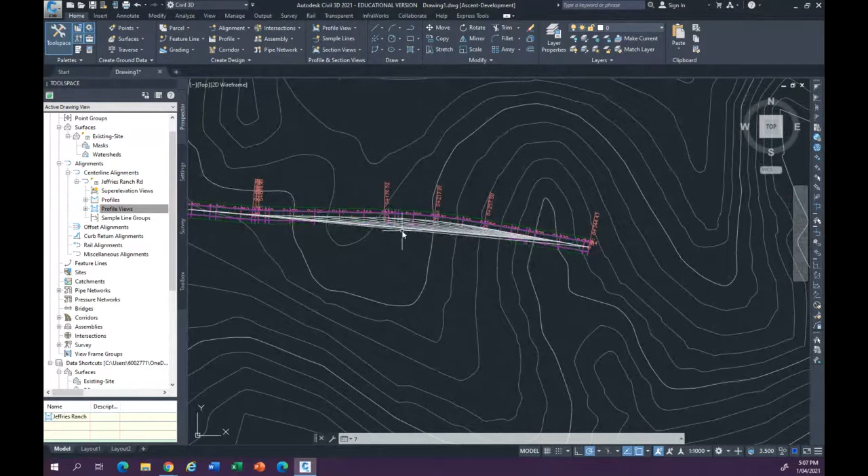So we know that, right? We know the profiles. In chapter 6, what we learned is the alignment, isn't it? We're learning the alignments in chapter 6, right? So we can see that we have the alignments here. This is the alignments, and I assume that you may probably have finished that. But if you haven't finished it, that's fine.

All right, and that is the... hold on, hold on, hold on. Are you Peter? Yes. Yeah, remember.

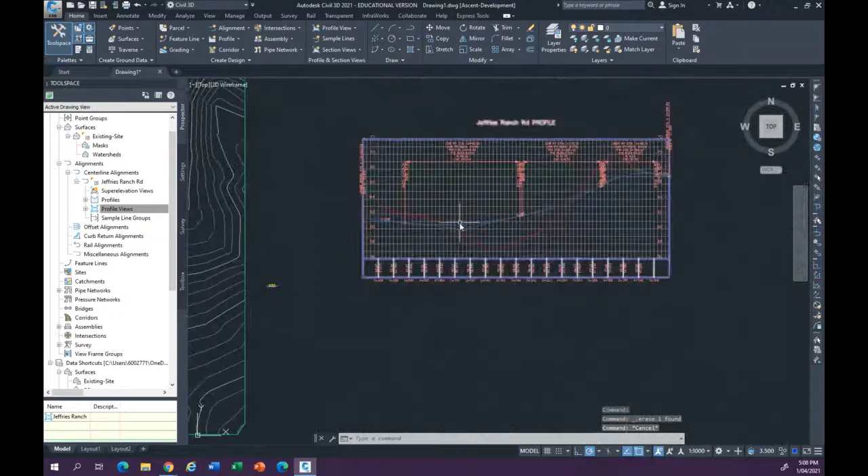Okay, so in chapter 6, what we did is the alignments, right? So after we have the alignments, how we can create... see, this is alignment, is it? Yeah, so we have alignments here. After we have alignments, we just have alignments, we don't have anything, right? So after we have alignments, you may probably need to, because the alignment has the, if you just create alignment, what happens is the alignment will actually follow the surface.

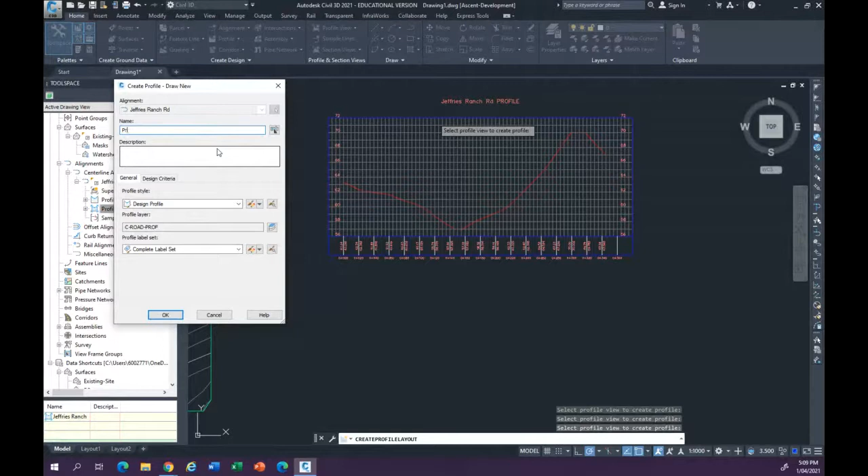So what we need to do next is create a profile to flatten a little bit of the alignment. So we can create a profile to flatten it a bit, like the alignment profile. We can call it alignment profile one. Okay, and then now we can draw some profiles. Where's my drawing tools here?

Okay, you can draw some profiles to say, okay, so I may probably want the road to be like 2 degrees grade, then 2 degrees grade, and probably like 2 degrees a little bit, and go up like this. I think it's a little bit hard here, cannot drive it. Trying to shrink it back. It's nothing, that's why. So probably go like this.

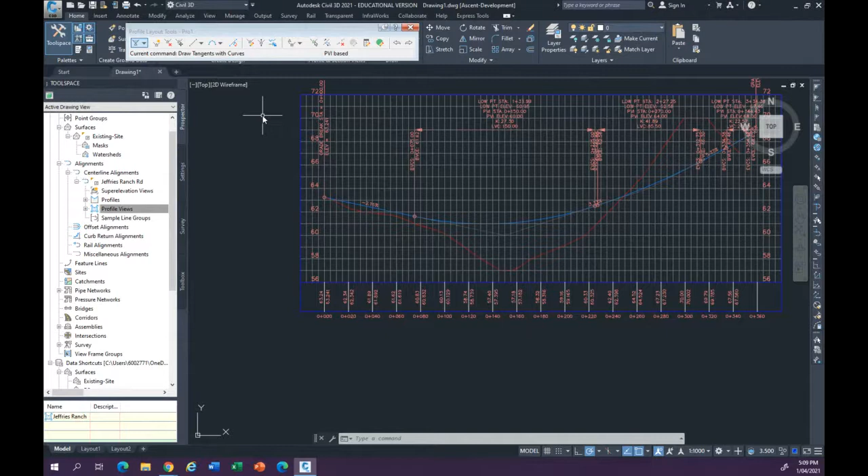So basically, the blue lines is one alignment for you, and then this alignment is for you to create a road, a corridor, right? And also you can create multiple alignments and then compare different corridors, compare different alignments, see which one was more economic, or more comfortable, or more suitable for you to create a corridor. So just create one alignment first for you to know, and after that, what you need to do is...

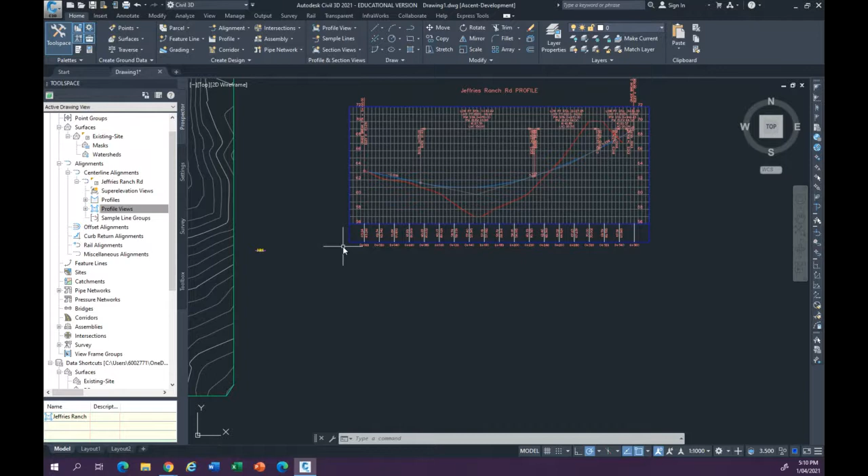After you have this vertical profile, what happens is you need to have a horizontal profile, which is the section view of the road, right? And then you can see, okay, what are the components on the road. So you can create a corridor like a sweep, swept from the alignment to the road. So that means this is called assembly in Civil 3D. So it's called assembly, basically assembly is a horizontal profile for you, right? If after you create assembly, because assembly is actually, right?

Assembly, why I call it assembly, is because it has a center line, right? It has a curb, it has the road pavements, and they have everything inside. So that means you can build your own assembly. You can create one and just put it anywhere in the empty space like this.

So I draw one here, so you can put it here. Just click that, it will zoom into that center line for you of that assembly. So that means you already have this assembly.

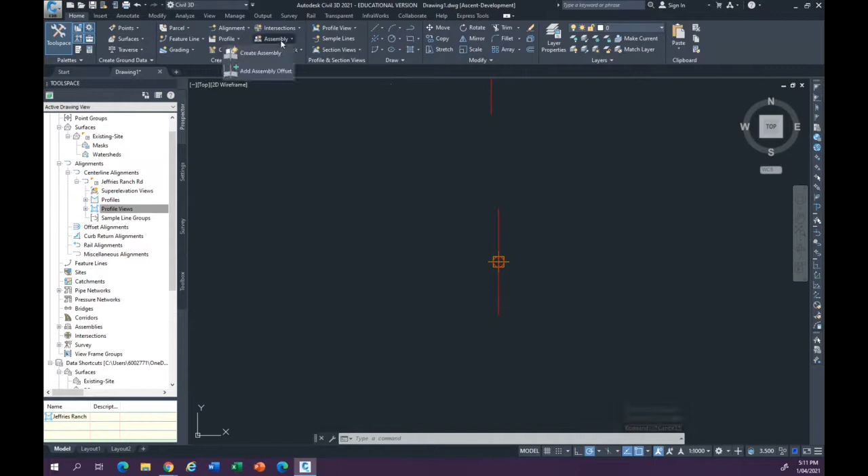Now you're going to build your own profile, your own horizontal profile. How do you build that? You can build it using the assembly you already have here. But you don't have any drawing tools for you to draw. You cannot use the lines to draw it, because a line is just a line. They don't have any feature.

So you need to go to the tool palettes, which is here. Tool palettes - if you create these tool palettes, these are for you to create the assembly elements. So you may have some basic lanes, some other shoulder like curbs, and some generic links. For example, if I want to have just a normal road, a normal pavement, you can go to this one.

After you click that, the property window will pop up automatically. If it's not popped up, you need to go to the property tab. So after you create that, of course you can, but you don't have any parameters set up, which is not good. Probably you may need to create it on the left, not the right. So after you click that, it will pop up.

This property is different from AutoCAD - they have quite a bit of parameters inside. You can choose the left side or right side to build a pavement, and then you can choose the width to build a pavement. That's great, right? And then pavement depth, and pavement 2 depth, and then base depth. So basically, they have all these parameters for you to set up before you create a pavement.

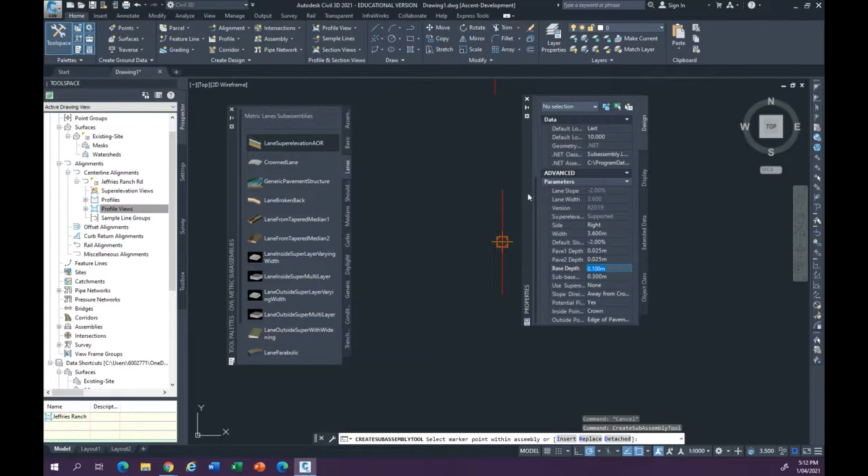So that means I can highlight 3.6 meters and go to the right side. Now I'm going to grade -2, just leave it as it is. And then click the center line - click the center line, but don't click anything else, okay? Click the center line here. It'll create one lane for you with the preset grades and subgrades.

And then the next one, you may probably create some curbs, as a gutter, to actually deal with the drainage. And then they will pop up another - they will refresh the new properties for you as well. And in the properties, they will have a little bit different settings, and they have all these dimensions. So actually I can't tell what kind of dimension this is.

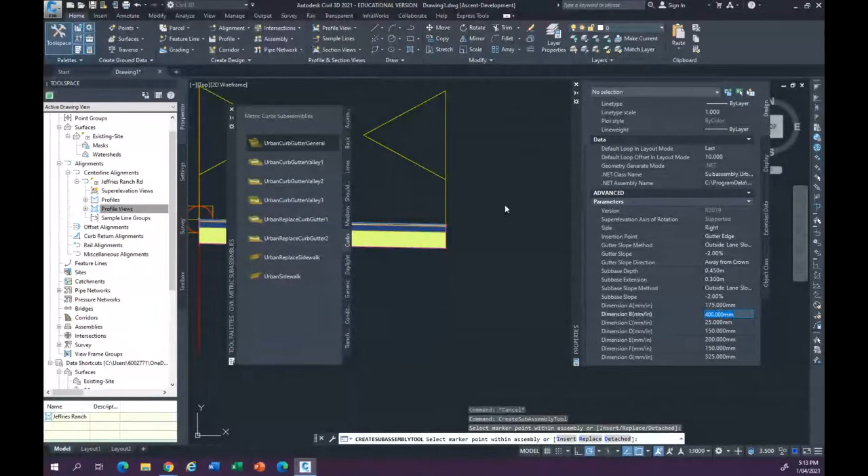You can try different ones, but I know this dimension B is the width of the gutter. So you can change it, if it's 400. If you just click, you may get confused where to click - you can click here, but it's not happening. So basically, what I click is the top circle here. If you zoom it in, I have a top circle. If I click the top circle, it will come up with the gutter for you.

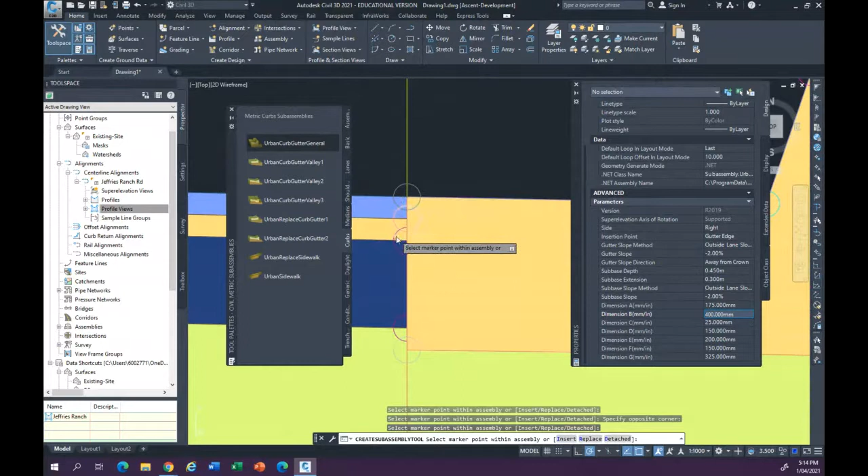And it will be connected. You can click the next circle here, or the circle here, it doesn't matter. As long as you click the circle inside, it will connect. You will actually have the connected gutter for you.

If you change it now, it won't change for you because you already created it. So you need to hit escape. If you want to change it now, what you're going to do is select the gutter itself, type PR for the property tab, and they will have all this come back for you. So now you can change it to 250, for example, it's changing for you. So just leave it at 400.

Not too sure what ABCD is as well. You can try different options, you can shift it, change the dimensions. There's lots of dimensions I cannot remember anyway. So you can change both and see what it is, then you'll find it's quite interesting. See, 500 actually shrinks it here because this length increased. So what was that before? 55? Yeah, kind of, okay.

All right, so that's the gutter, right? That's the gutter, and then you may probably create some generic lines to represent other stuff after the road. So you can generate some stuff, like generate some lines, and right as well.

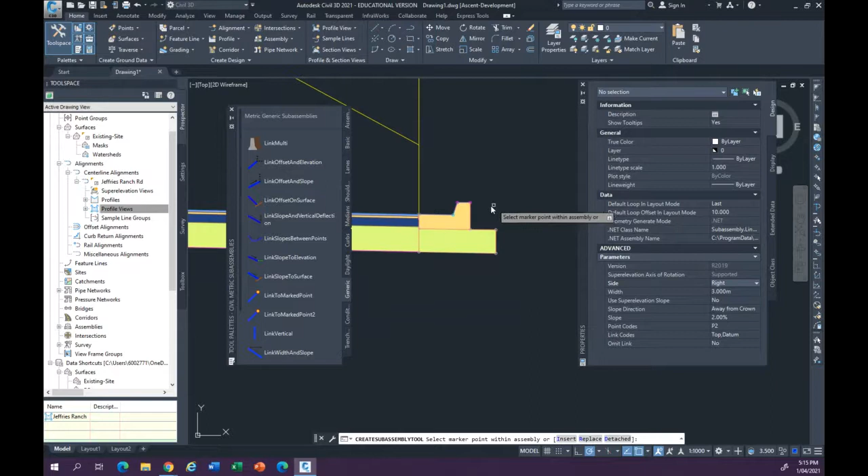And then if you click left, what happens is it will generate from here to the left, which is not the one we're looking for. So if you generate the right side, you always choose right side, but not left and right and left and right.

Okay, and then you can just let it be the circle as well. Select circle as well, and come up to just the generic lines to represent everything, just after the road, just next to the road.

So now you're going to create the left-hand side. You can do the same again, like click that one, but on the right-hand side choose left, and then change the width, and change the parameter you need, and create the left-hand side.

And also, you remember that in AutoCAD we can mirror, right? We can mirror, so click that and click mirror. What happens is it won't let you select anything. It will mirror the whole assembly, which is not the one we want.

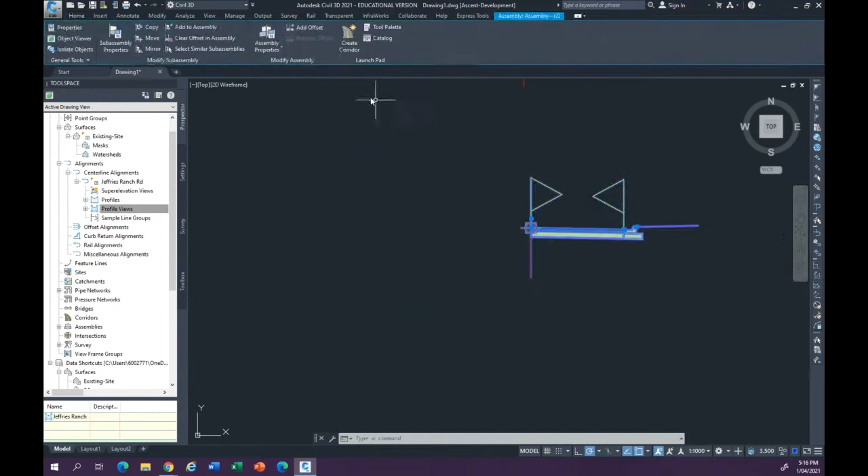So what we need to mirror is they have a sub command, it's called mirror subassembly. This is for Civil 3D. Or if you select all of them, they have the mirror here. So click the mirror, and they will ask you to select the line to mirror.

Of course, we select the center line to mirror, right? Click the center line and mirror to the other side. Okay, then that will be the horizontal profile for you.

You can create lots of horizontal profiles because when you're creating a road, when you're turning, you may have another profile like super elevation on the right-hand side, turning left, turning right, super elevation on the left-hand side, turning left, super elevation on the right-hand side, something like that.

So you need to create multiple alignments, multiple horizontal profiles, and apply into different sections. Apply in different sections, so just apply all the sections, all just these sections, apply to the whole alignment and see how it goes, right?

So after we have alignment, after we have this vertical profile to flatten a little bit of the alignment, after we have the assembly, everything should be ready, and then now we can go into the corridor, to create a corridor, all right? Create the corridor, so now the corridor is popped up.

What happens if you don't have this two? I delete that, okay, and try to create a corridor. What they tell you, they still can create that because you don't need to have assembly.

But what happens if you have this? You still have this, how was that? Let me just bring this back. But what happens? You haven't created any vertical profile, you only have the surface profile.

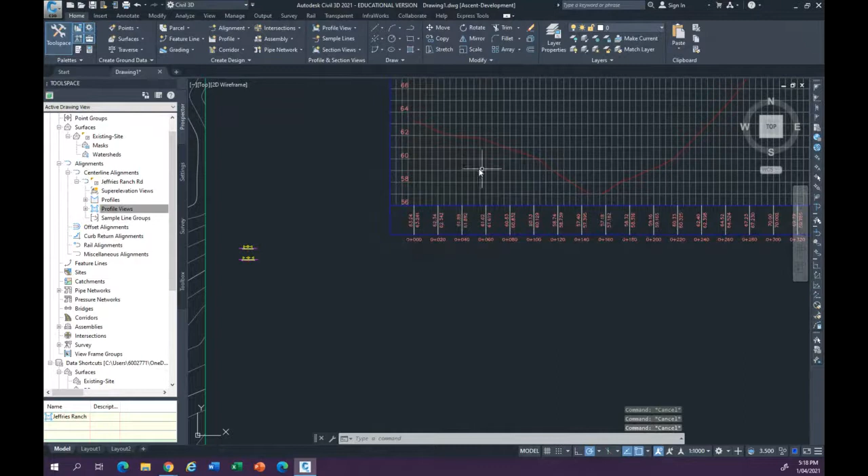And if you click the corridor, what happens? All because you have the surface profile. Not deleting this, I have to delete this surface profile and profile view. Yes, deleting, so profile view, I can delete that, and delete that, okay.

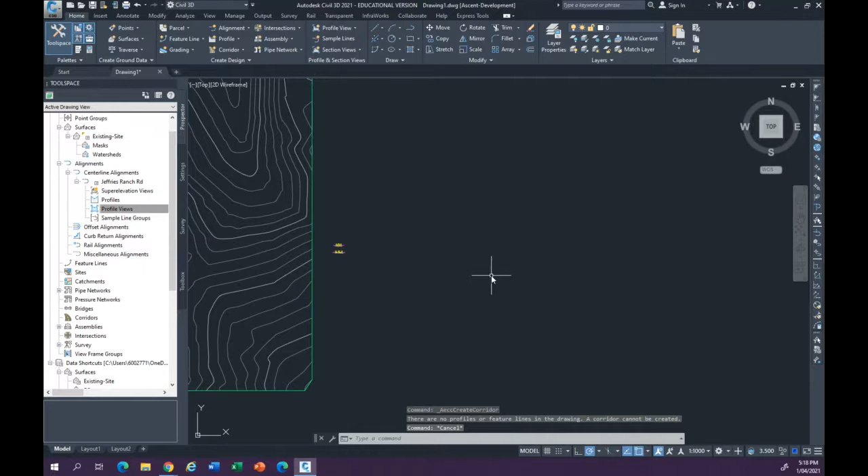Yeah, still okay. So when you don't have any profile views and click the corridor, what they tell you is there are no profiles or feature lines in the drawing. The corridor cannot be created. So that means a profile view is necessary in the corridor.

So that means you need to go back to the alignment again and create a profile view, which is here. All right, create profile view and come up to here, and then what profile view is it? You need to create a surface profile first. If you don't have any surface profile, they cannot create any vertical profile for you.

Okay, surface profile, click OK. And the surface profile should be created, and they'll tell you in this window. See, surface profile has been created.

Okay, and then now you can draw the profile view, which is here. Draw the profile view. So after you draw the profile view, they still have the profile for you, right? In this case, we still can draw the corridor, we still can make the corridor, because we can use the profile as it is here.

But what happens is your car's gonna run like this and then go up like this, kind of like playing that thing, how to say that, yeah, kind of.

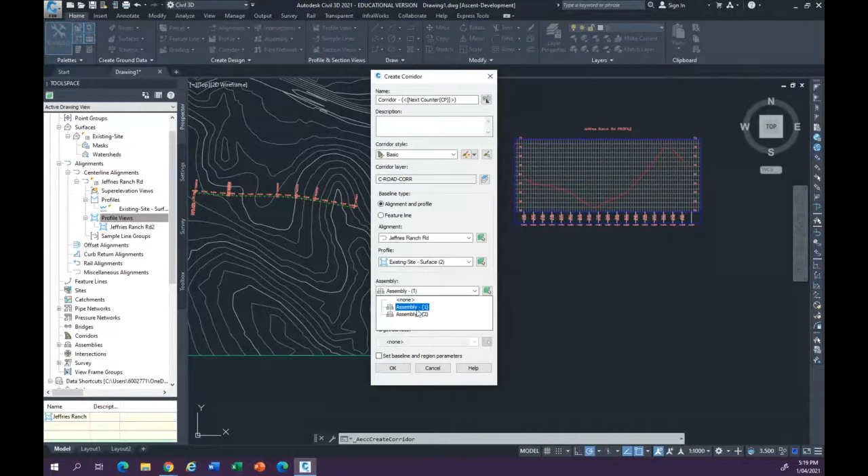Okay, and then now you can select the assembly to choose which assembly you want to create the lines, right? So I create assembly 2, okay, and click OK. Now it pops up as this one, and then you can click apply. You see the exclamation mark?

What that means, that means it's out of date. So that means here you don't have any roads, you don't have the corridors, right? So you're gonna click OK, and then they ask you to rebuild. Yes, rebuild it, and then the corridor should come out.

But the corridor is based on this surface. So that means the corridor, I can let it go to the object viewer. And you can see how, like, this is not that flat to drive, right? Not that flat to drive. And you can always see this if you'd like to visualize it really well.

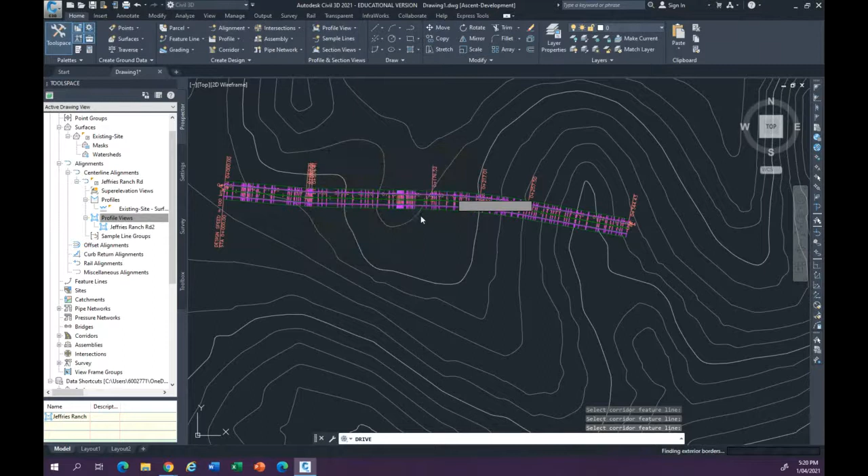So if you select the corridor here, you can drive. That means you're actually sitting in it. So after you click drive, go select the corridor, then select the corridor here, choose which feature line you want to drive. Just select anything, so it comes like this. And then you can choose the speed you want to drive and everything, and just click play.

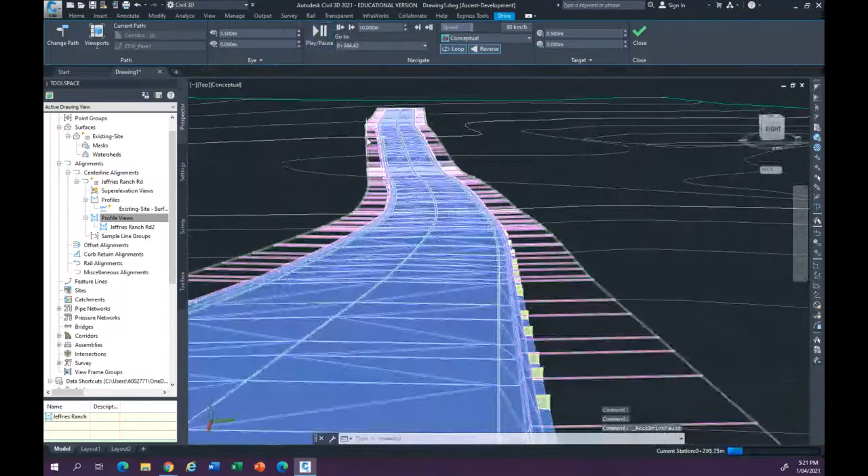So you can always see like this. You see the first curve here, right? It's really steep. That means this surface is based on the surface here, probably driving from this side. Okay, from this side.

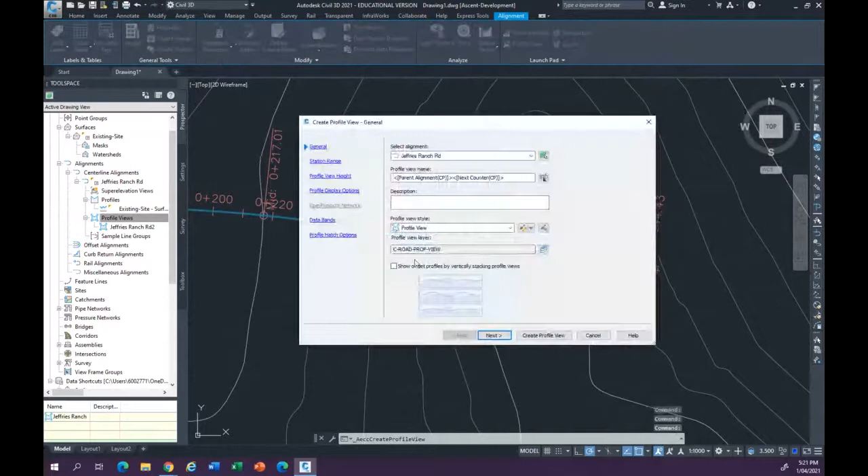So basically, you need to actually not create a corridor, so you can delete the corridor if you want. Delete the corridor, and then draw a vertical profile view. Like not here, you already have that.

1 by 1,000. The one? The one you're looking for? Yeah, 1 by 1,000, you can change that. You can change it later on if you want. Okay, yeah, all right, um, all right.

Hello, Melvin. Yes. Sorry. Yeah, that's right.

Okay, so in this case, you can see that I need to draw a profile view, which is here. Profile creation tools, select the profile view, and then draw a little bit flat. For example, click that, and then I can click draw tangents with curves, and go into it, and just probably a little bit flatten.

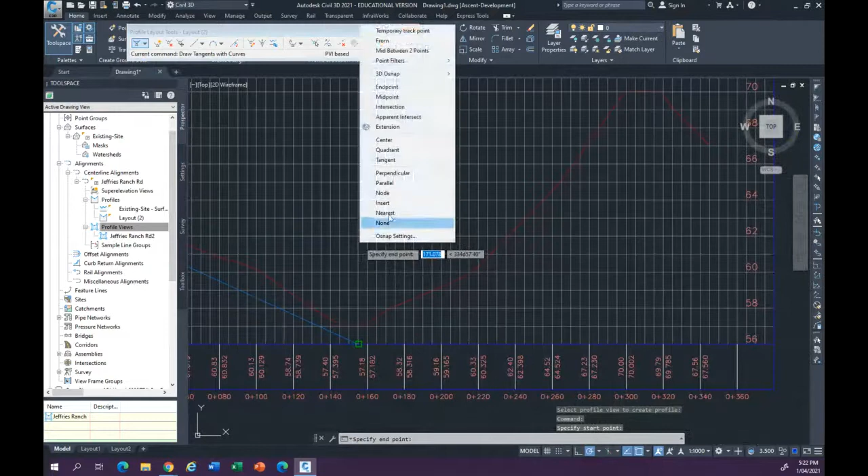A little bit flatten. So flattening will actually reflect your material, right? Reflect your material, you're gonna fill the whole part and cut the whole part and just probably fit into here. So make it, the most economical way, probably the cut and fill will be the same, and just put this into here to fill that roughly.

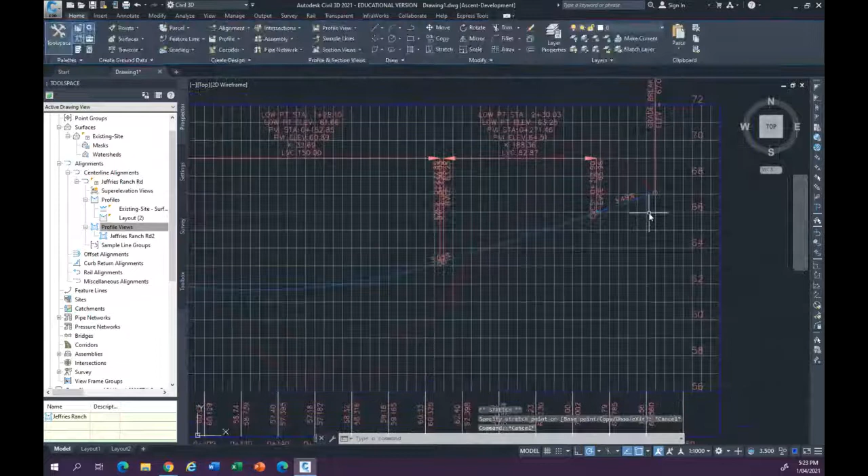All right, so after creating that, they will have this labeling for you. If it's like that, you can add the label if you want. Add the label if you want, and you can always string it like this. Click that and then change it like this. Okay, if you feel it's not good, you can also create another one as well, still the same profile.

You can create another one, like draw another one, just turn off this one. Draw it probably a little bit deep, like this. Okay, like this. And see how it goes. So now you have two of them.

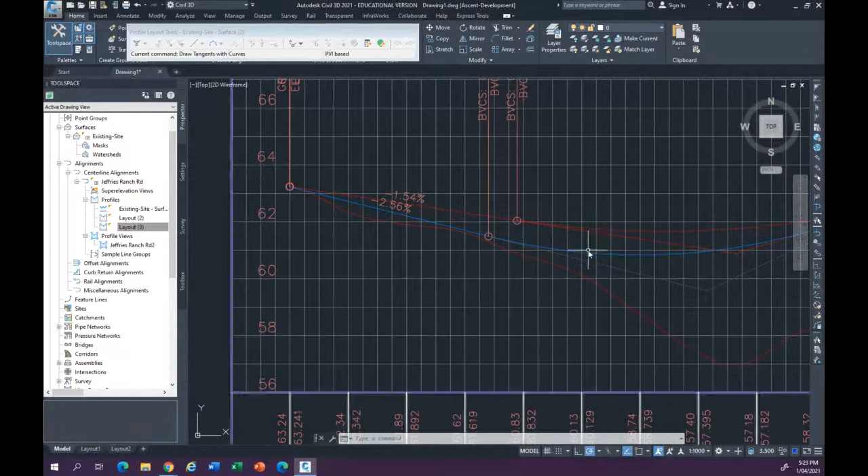So in the profile here, we have the existing site, which is the red one, and layout 2 and layout 3, which are these two. If you don't know which one it is, you can go to the properties and change it to a different color so you can tell them apart. So probably the dash line red is profile 2, and the blue one is profile 3. So now you know what that is.

In this case, you can close that and go to the corridor again, create a corridor. So in this case, for profile, you can choose which one you want. And then, of course, for this road and assembly, you can choose which assembly you want, and click OK, click OK, and rebuild that.

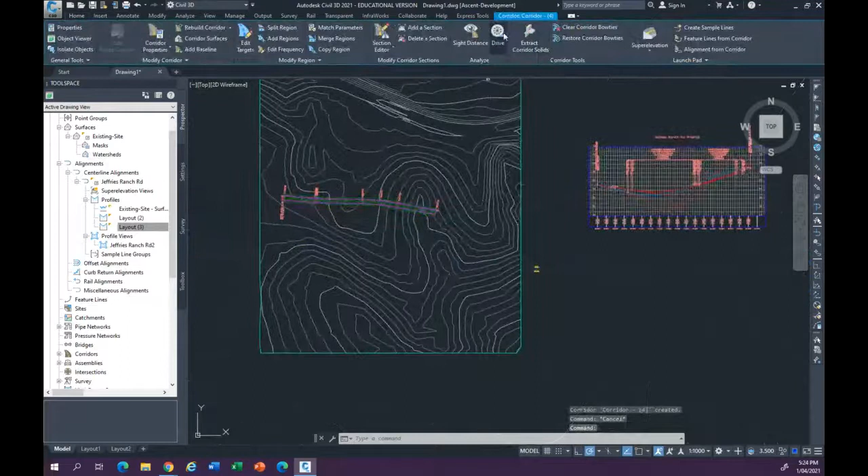Then it comes to another profile, another corridor for you. You can drive and see what's going on. So see that the road before was really high, but now it's getting flattened, right? Because I made it flat and it looks good now.

But we need to set up lots of criteria. But you can drive it, I can drive over speed - no cops here, so don't worry about that. So you can drive over speed and see what's happening. If you have a really long lane, you can try to drive it and see how it goes.

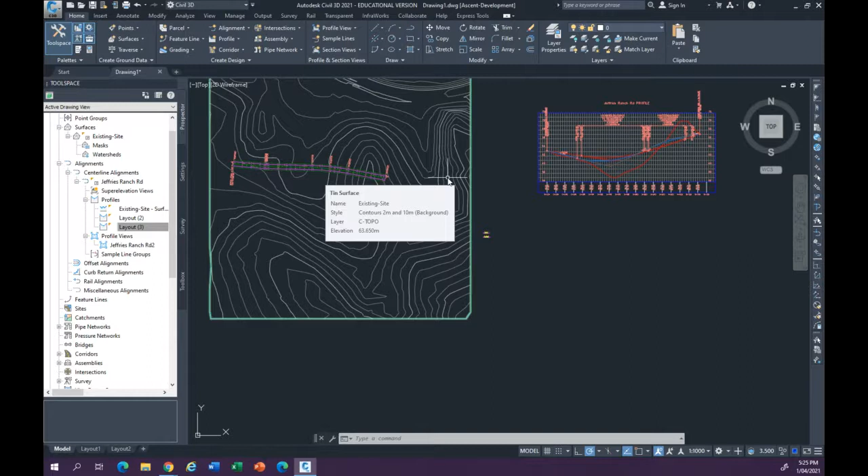And actually, after this one, you can try to create a drawing for that profile view. Basically, how you create a drawing is you just put your title block here and put it inside. But they have another way, which is a little bit weird.

So if you click that, you don't have anything here. But if you go to the upper tab here, you can create a sheet and create the frames - these are drawing frames. After you create drawing frames, you can create the drawing. So you can create new frames, for example.

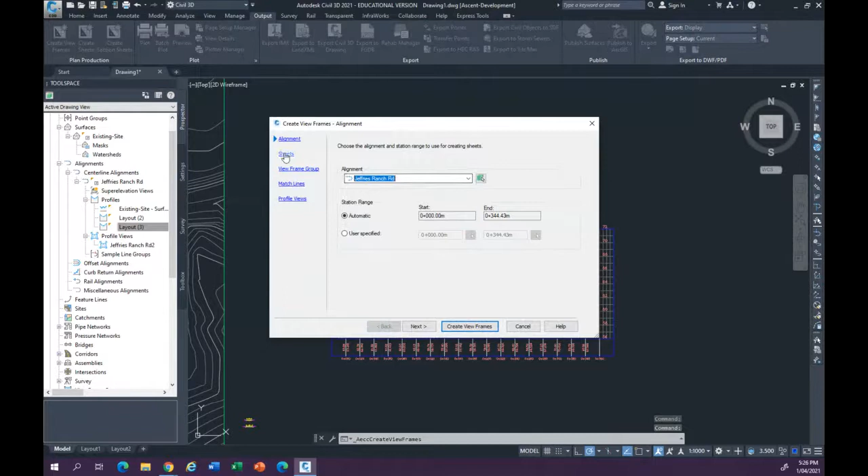Just create a new frame here for which road, for which sheet, and then what kind of content you want to put in. You can put the profile here only, which is that profile. You can put the plan and profile - they will have two of them. You can put plans only - they will have one - or plan and profile, which has two views on them like this. So you can put it like this.

All right, put the profile only, and then click next. Whatever you put here should be okay. You can change the styles, and then just click next, and click create the views. After it creates views, nothing will happen because you just created a frame - you're gonna create the sheets next.

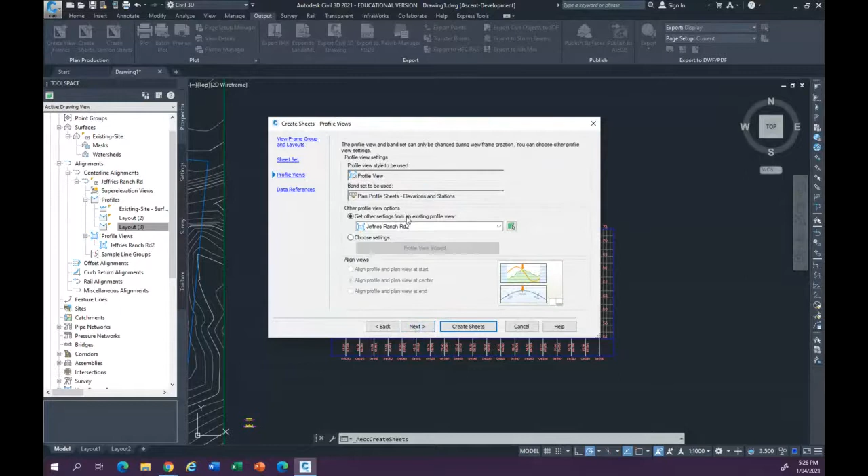If you create the sheets, they will have a frame group for you - this is the frame group that you just created, the frames. So that's a frame group. And sheet sets depend on what name you want, and then a profile - yep, that's it. And then data references - what else do you want to create?

Just create the sheets. It must be saved - yes, I want to save that, I haven't saved yet. All right, what about that? Yeah, replace that. Okay, and it will create the profile view origin here, and it will actually create the sheets for you automatically when I set up the title blocks, everything.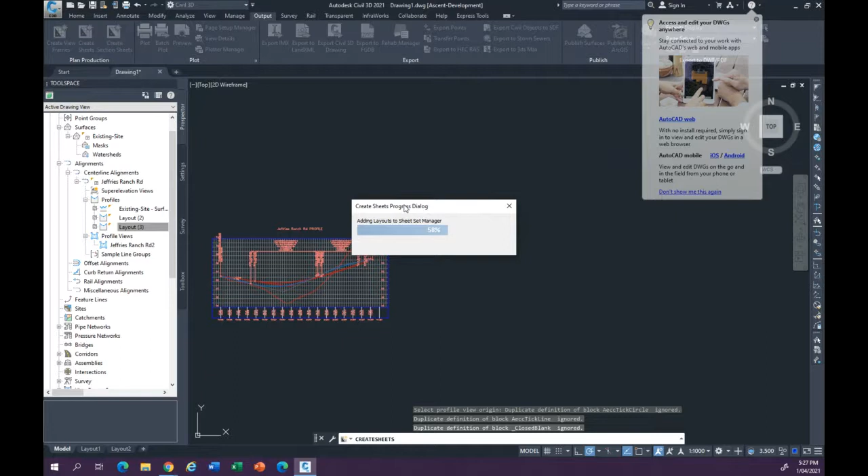A little bit slow, but yeah, you can try it. You can do that. You see here, so the information means one layout was created in this path in the temp folder. So that means I need to go to this path to find it. You can choose which path actually.

If I open that, you will have only one drawing, and to fix the sheets like this, and then you have your profile inside. There's nothing here. It's a new file, alright, it's a new file. So you have this one.

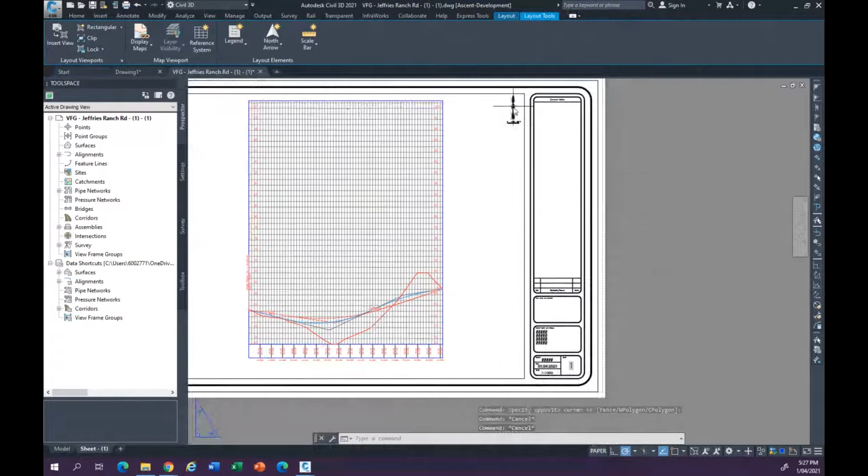Of course, you can set up your title block, everything, and then they'll create this one. They created the sheets for you in 3D. So after you set up properly, you don't need to worry about those, just create the frames and create multiple sheets.

So this is the frames that you created. They have the frames here, and then you can start the frame and create sheets on that. So that's the drawing frame for you to use. I'm gonna delete that, yes, I'm gonna delete that.

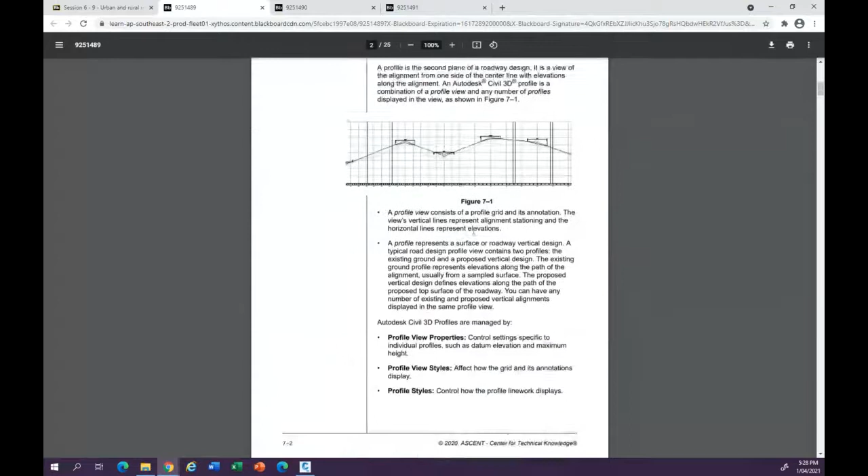Okay, so that's the corridor. In the chapter, where's my chapter? Here. In the chapter, it's profile and corridor. Actually, I taught all of them in half an hour. Of course, they have lots of things to talk about. I probably see they probably have some of this.

For example, change the words here, change the titles here, change the labels, what to label. So you don't know what label is inside here. You can go to properties and select the profile view properties.

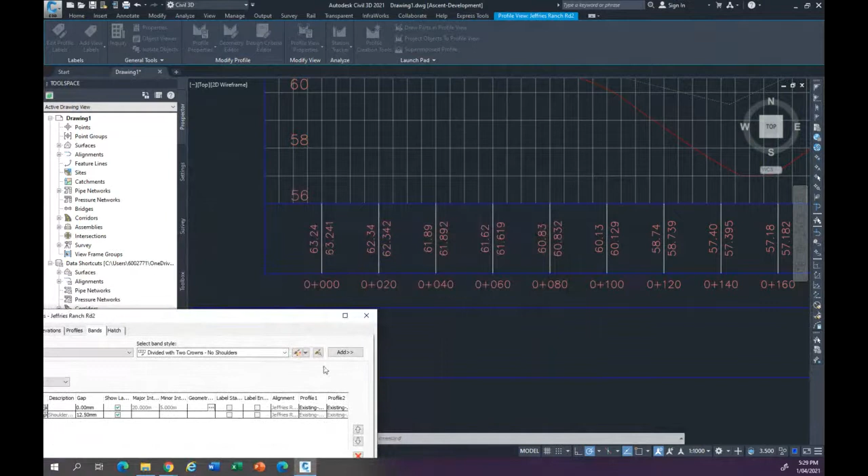In the profiles here, you can see the profile of this view, but the bands here tell you what's here, what's talked about here. So you can add another, for example the super elevation, add, and then click apply. They will have a super elevation here, but probably they don't have any super elevation here, so you don't have that. But you can say vertical geometry, add, and apply. They may have vertical geometry for you.

And this, which is really close. You can add something else. For example, you can change something else.

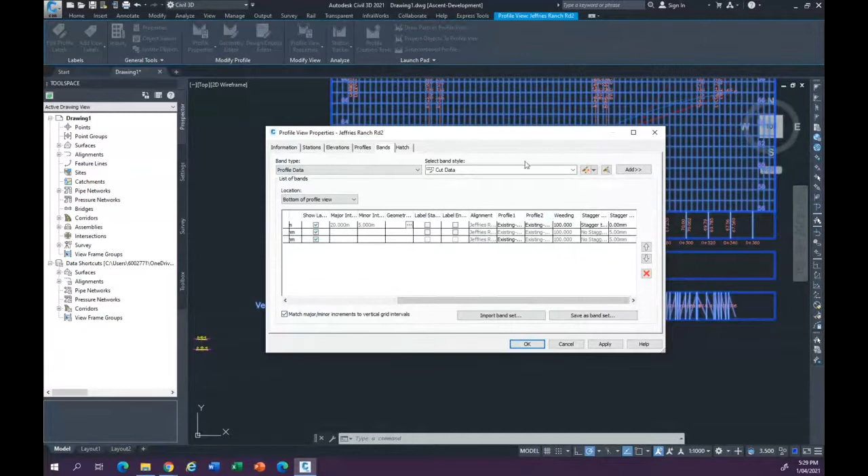You see the profile 1 and profile 2 in the first row here. The first row is talking about the profile data. In profile 1, profile 2, it's talking about the left and right number. See the left and right number - basically, the left and right number is the same, because they use the same data. It's the same data, which is existing site profile, existing site profile, right?

That's the elevation. So you can change this to be layout 2 and click apply, then it comes to the elevation of layout 2, right? And then if we change the first one to layout 3, it comes to elevation of layout 3, so it's not the same now. It's not the same now, right? It's not the same now. So you can change it like this.

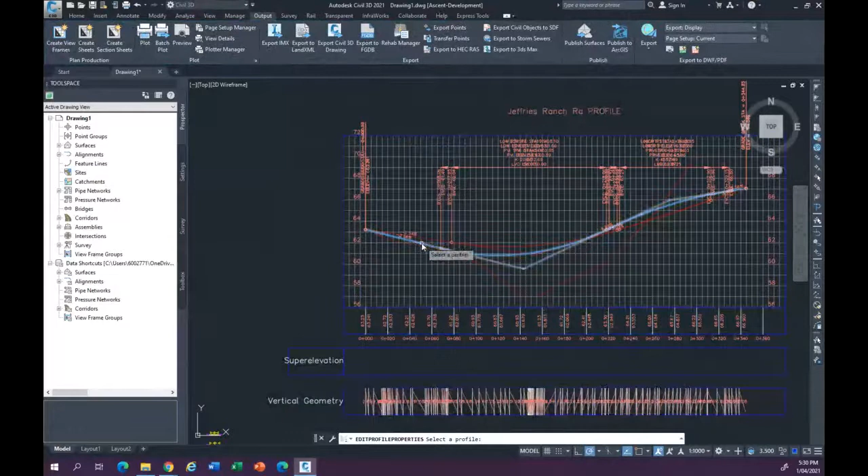And also they have lots of settings like profile properties and set the profiles, and then they have these properties for you to set up. You can try to explore that, but something that is too much is too much. You can try to explore that, alright. And also the profile properties, there are too many as well.

Like the hatch, you can select which hatch to use, like this, alright. And you can delete that, delete the hatch, okay. And then you may have the profiles - what profiles you want to show, what profile you don't want to show, alright, like this, and then elevations, which elevations you want to see.

So basically, if automatic, that means they will show all the elevations for you. But if you say specific, I don't want to show some elevations, you can say like 56 to 60, for example, and then apply that. They'll actually cut a lot for you, not a little bit.

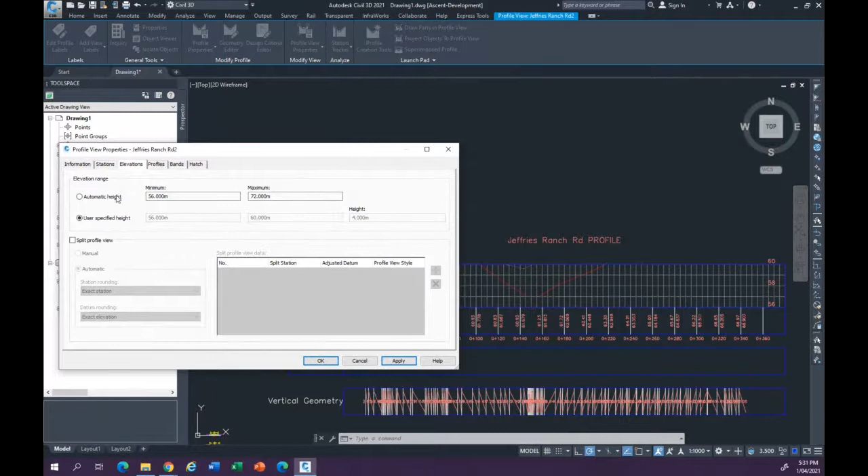So this, and then you have the stations information, like which style you want to use, the full grid or something, right? And then click OK, and there's a full grid with all the labels here. So how you choose the labels depends on your styles. So that means it's gonna be the styles here, right? Gonna be the styles here.

So that means you can choose the grid, like how much grid you want to extend, and how much axes you want to extend. And whether you want to show all the vertical grids, or only the vertical grids inside here.

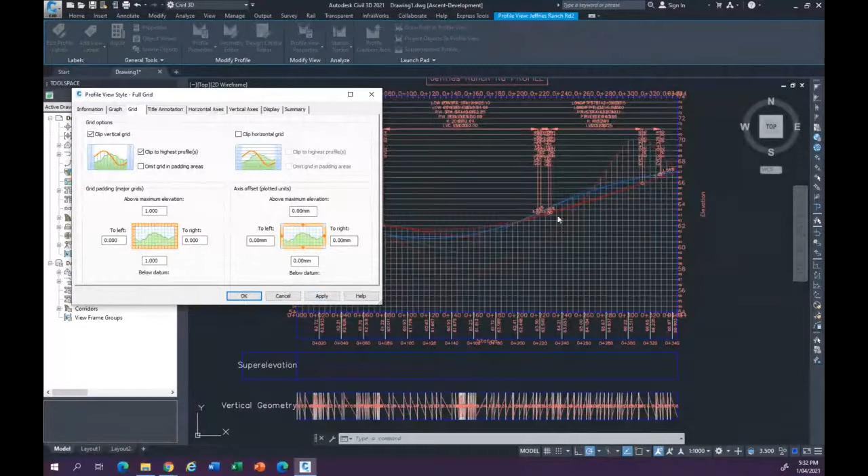If I click apply, what happens is they only show the vertical grid of the surface. If I clip to the highest, that means they'll clip the vertical grid here. That makes it really clear what the surface is, where the surface is. And clip the horizontal grid as well.

So nothing on the top. That means there's no grids, and then it shows up like this, which is really quite easy for you to see. Okay, so what's the surface look like? What does the surface look like, right?

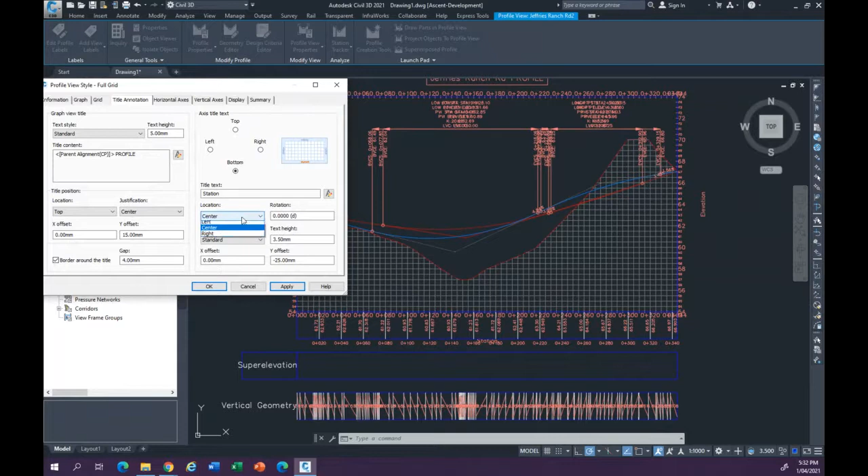And then the title and annotation. That's all the annotation, like talking about how to change the word, change the fonts, change the location of the titles here. Okay, you can try to change that. It's something general.

And horizontal axis as well. So some talk about the major and minor axis, what's the gap, what's the interval, what's the gap you want to use, right? And then vertical as well.

So they are all general things, and you can see that these are the labels. Okay, these are what you're talking about. So left and right, and then the display here is a bit general as well, because you want to display.

So sometimes I probably don't want the horizontal grids. Horizontal is like the major and minor. Okay, left, right. Grid horizontal, major and minor.

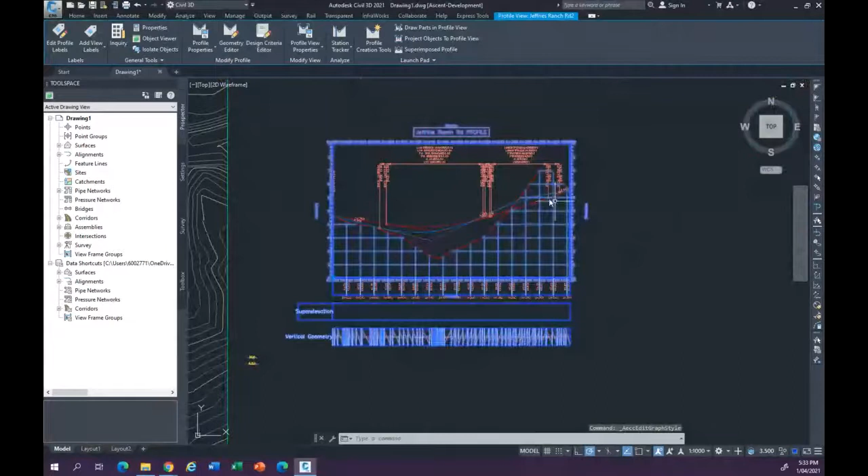If I don't want the minor only, then it will look a little bit simpler for you to see. Because if you tick the minor, there's lots of grids for you, right? You can just untick the minor, and it comes like this, okay? Which may be probably easier for you to see.

And the words here, of course, are overlapping. You can try to grab the word somewhere if you want and extend this graph a little bit up, then choose to change to not overlapping, right? Not overlapping. So that's how you can change a little bit of the profile view.

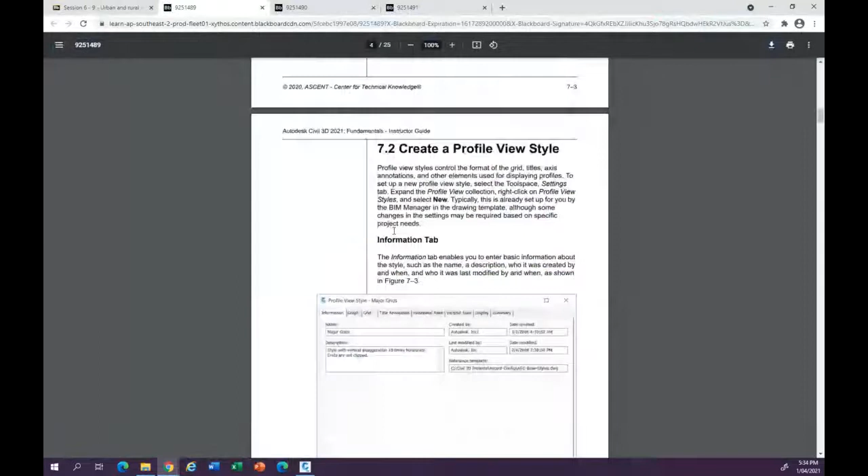What else? I mean, I probably won't talk about all of them because, all right, I think we're not putting the right thing here, because they're talking about really detailed stuff. This is really detailed, and you can try to have a look at that.

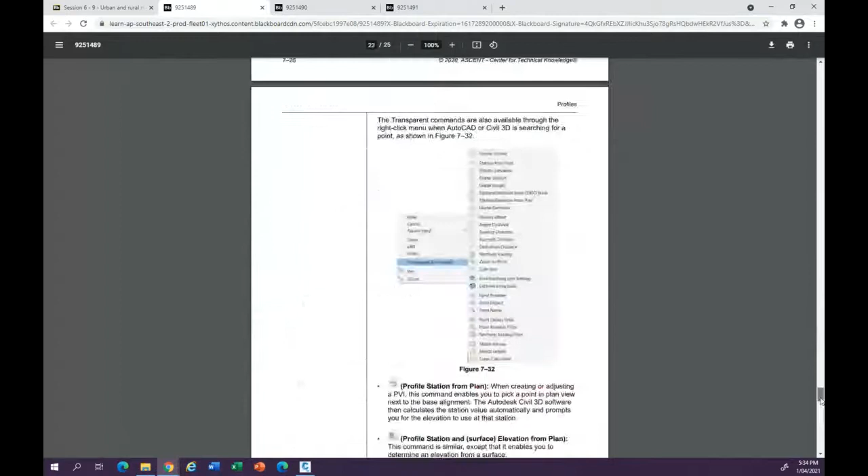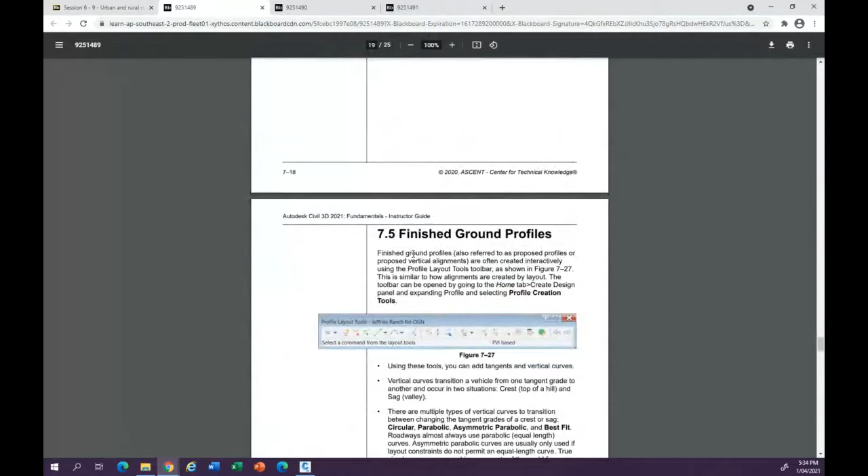Because I think we didn't put the lecture notes, but the whole lot, we put a whole lot of time in. So that means you can really have a look at it, because they have the words to explain everything as well, which is good, and it's related to your questions as well. If you just go and have a look at that, that'd be great.

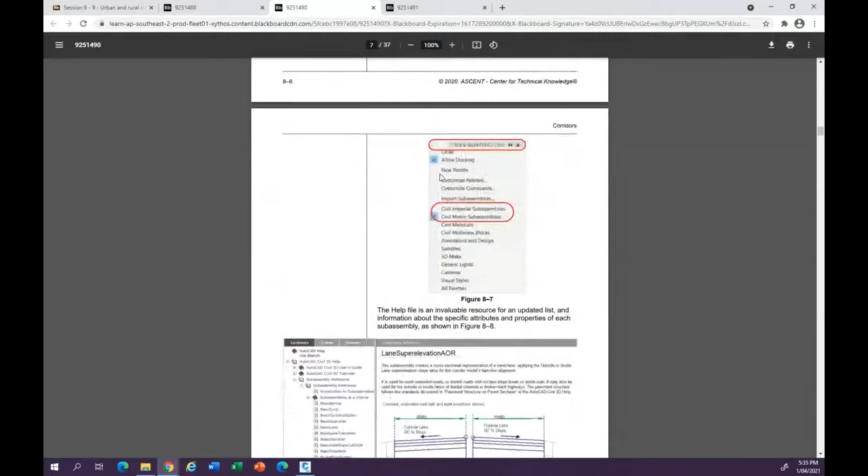Okay, and also the corridors as well. So as I said, corridors basically will be the assembly drawing. So in assembly, they will have different assemblies for you, and then as an assembly drawing the collections, and then how you can draw the assemblies in the tool palettes, right? And then so the tool palettes here.

No, but I think I put it here. What I put here is just really detailed. Oh yeah, that's all right. I can tell them to choose this. Well, this is really detailed, so you can have a look at that. This one is related to the questions as well.

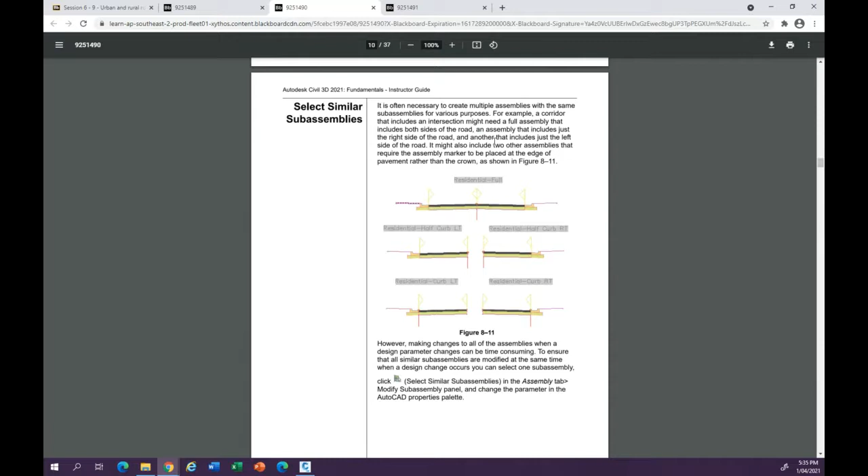See, they can, yeah, you can do undivided, like the crown, what's that? Section views, right? The crown roads, and then be a flatten roads, and then you can use undivided and divided, right? Divided, that means they have the median strip, right?

Then you can create a corridor, and after creating the corridor, you can try to play around and drive the corridor, right? So this, and then this is the corridor, how you can split the corridor, okay? Split the corridor. Why do we need to split the corridor?

Because sometimes we may have, what's that? We may have a road intersecting roads somewhere in the middle of the corridor. So if you have a corridor like this, you're not able to create an intersection for that, right? So that means you need to split the corridor, split region.

You see that? If you click the split region, they'll ask you to split the region from here to here, for example, from here to here, and then now it splits into three regions, and then now you can try to delete one region.

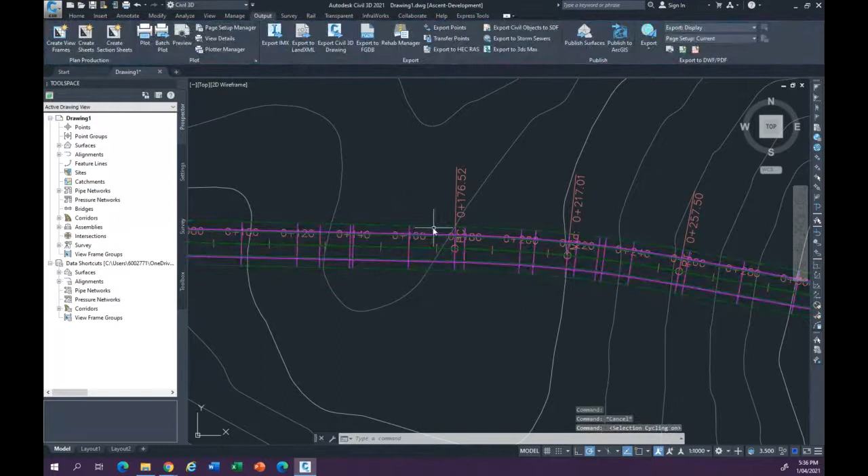They split the corridor, but delete the regions. Delete the regions, select the corridor, delete the regions, and delete the inner regions, and then it comes to deleting the inside.

If you have a road here, you can design an intersection here. Design intersection here, which is these intersections. You can create intersections, and then find the intersecting point. We don't have an intersecting point here, so I cannot create that.

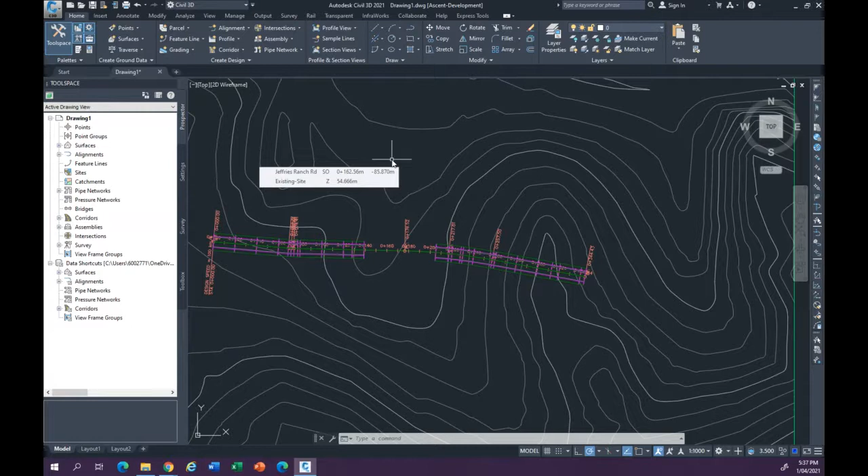After you create intersections, you'll most likely be setting the offset of the main row and the offset of the minor row. You want to decide how large the radius of the intersection is, and then it will visualize that for you, because there's a graph inside, and as you set things up, it will highlight that part. So you see which one you're setting up, and you can choose whatever you like, then just create that, and the session should be okay.

There's a target mapping for that, and this is a corridor frequency, which means you're going to extend the corridor into the roads, which is fine. Feature lines, okay, feature lines.

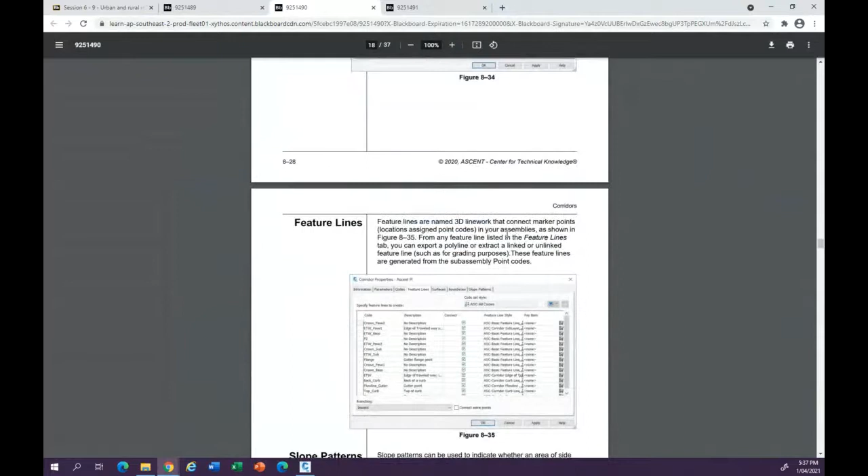That's why I said, see, they have the graph here as well. So after you design everything, and when you study everything, they'll highlight it in the graph, so you know which part you're designing. The same applies here as well, you can know which part you're designing.

You know much better once you're doing the practice file than what I'm talking about here.

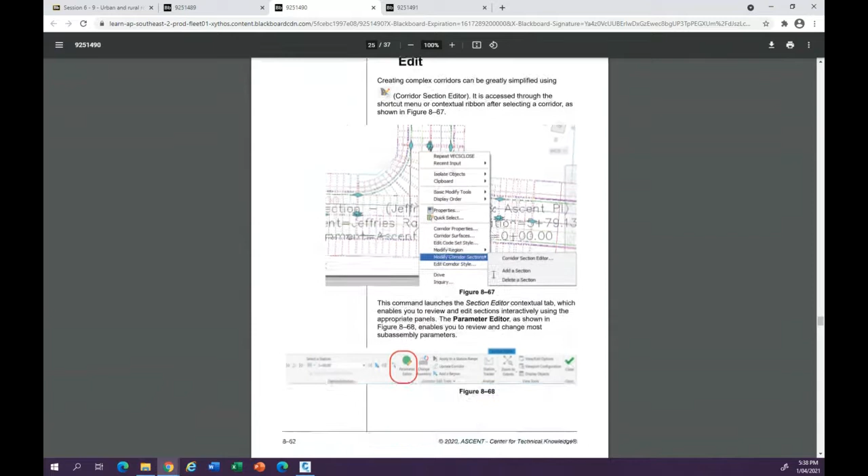Session review, and this is session review, to modify the corridor sections and set up the corridors here. All this is horizontal - these are horizontal sessions to modify that. You need to do it.

You need to do it in the practice file, because when you do that, if you have a corridor here, you can do the section editor. You can go to the section editor and try to edit the section - see the parameter editor - and then this window will come up.

So in this case, what you need to do is change different settings of the slope direction on the right hand side and the left hand side, for each part. After you set up each part, they'll update into here.

So you can override them, like the base depth or the width - it's easier to change the width.

Left hand side, right hand side, right hand side lane. This one is not one that you can change, but we can change the grade, the default slope, to be -3.

They should be able to change that here actually, but it's just too small to see. After that, I'll close it and change it in that section only.

Because you can see that in the corridor here, you can choose different sections to modify. Modifying these sections makes a difference.

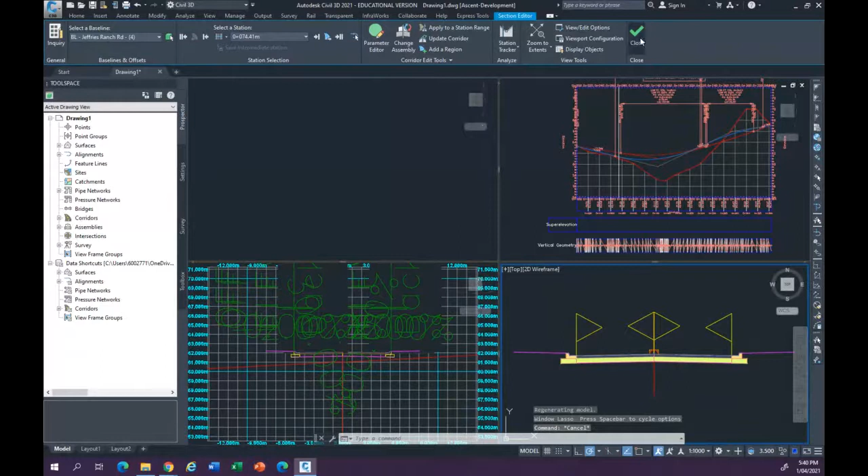It will show differently here. All right, so that's fine.

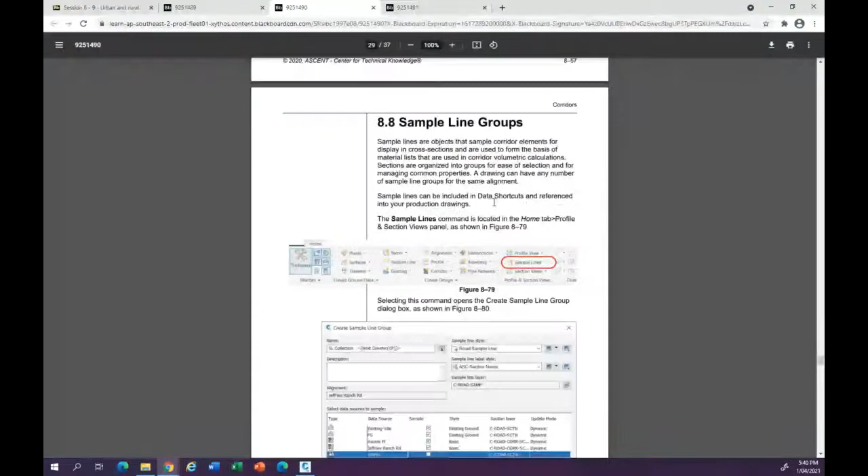Corridor surface - that means you create a corridor surface. You can try to create a corridor surface here, and then sample line groups, which are for you to set up to make the cut and fill.

Okay, see the material - so you can make a sample line here.

After creating a sample line here, you can choose the compute material. I can choose my range - the whole range - then just click yes. This is the center line, right? Station doesn't matter.

So if you have the sample line here, you can use the output. Output goes to the analysis, compute materials, from the center lines. See the sample line? It's the sample line groups here. Click OK, and then you can compute the materials, and with these materials you can choose based on which surface you want to compute.

Because you have a surface, you have a road, right? You have the road sample line. So that means they calculate the differences between the cut and fill. See the cut and fill here over with the material list. Click OK, and then they will compute the materials for you.

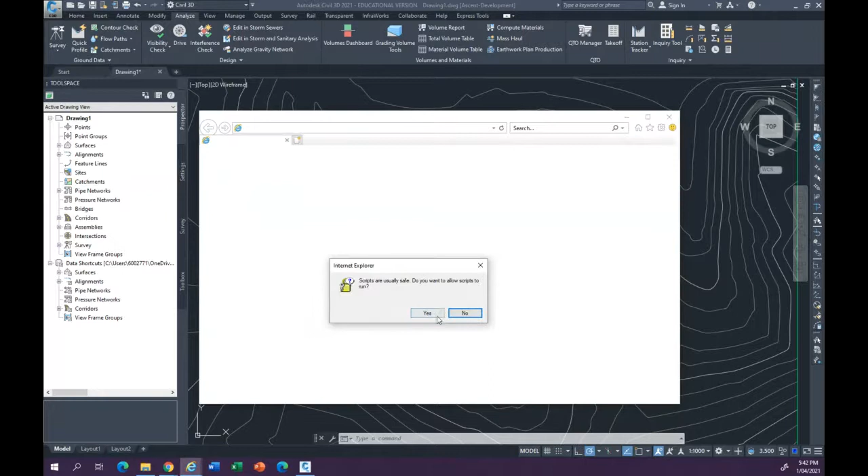Then you can go to the volume report to find out the material list, click OK, and it'll pull up this one for you, which is the material list. Sometimes you just click yes twice and it comes up. So that's the material list, which is nothing here, okay.

Probably I haven't set up properly, but it will be the cut and fill inside. If I select that one and create the material list - sorry, give it a new material, corridor shape here, and add that inside.

Material, which is pavement 2, and surface, okay. And it comes to this one - see if I can have that cut and fill report. Well, if I can have a cut and fill report... still no, but don't worry about that. If you have that, that's how you're making the material computing.

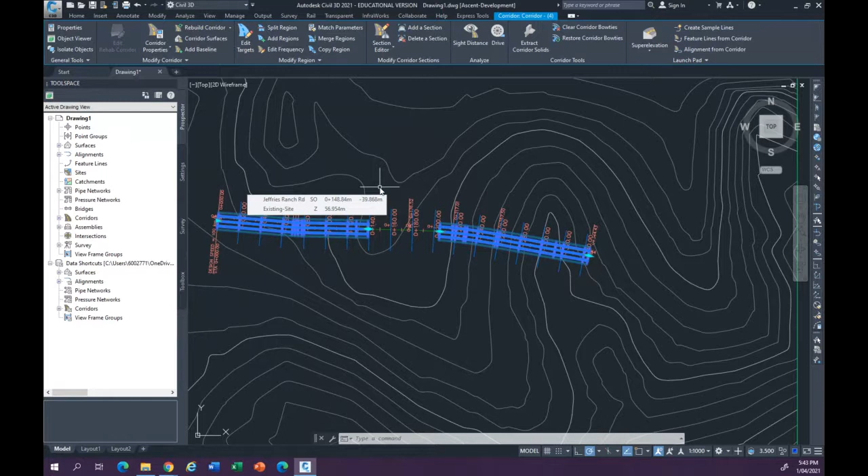When you're doing this - oh, because I haven't created a surface for the corridor. So at the moment the corridor is just some lines. If you create a surface, then you have the thickness, and deducting with the surface thickness, they will have the cut and fill. That's why they're talking about the surface first, which is here, corridor surface.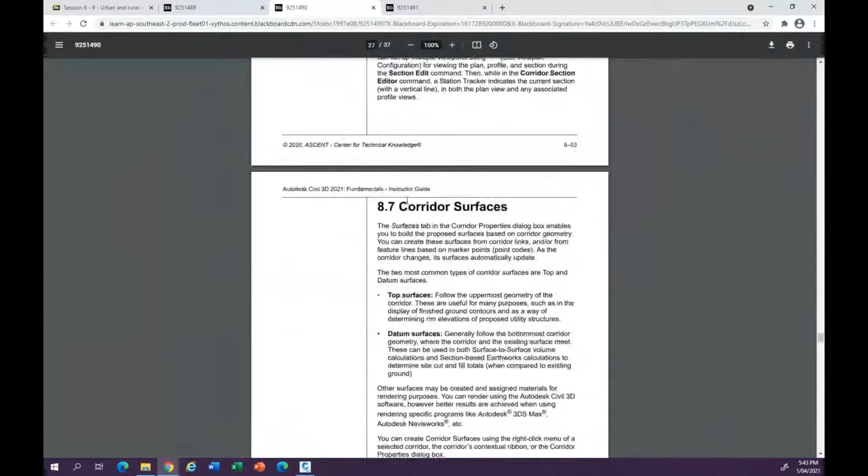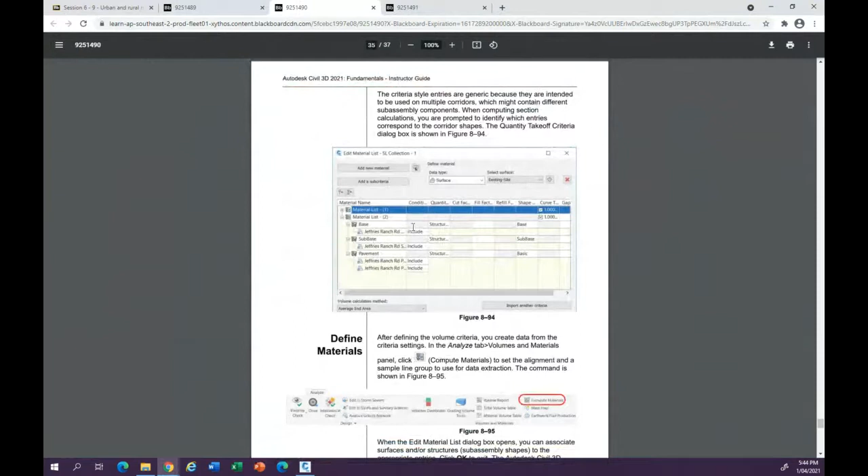After creating the surface, they will ask you to create sample lines to compute the material - to calculate how much material you need. Then volume calculations, like how much cut and fill you need, and then you can choose this material list and it will come to a report for you.

Okay, so that's corridor. Corridor is a big part for you to know. That's why you can see there are lots of - what's that - practice files, like 8H something. So corridor is a big part for you.

And if you go to grading, grading is the last chapter for you to know. Grading is kind of to make the field, okay, to make the field with the slope field. So basically with grading, you need to have a feature line first.

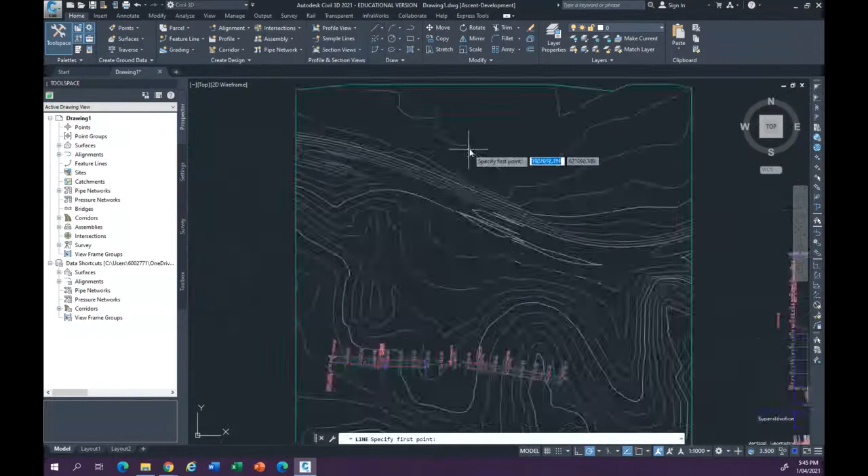So the feature line is here. You can create a feature line. If you have some lines drawn here, I want this to be - this is not the P line. We're going to use the P line and create some feature lines here, for example... close. Okay, so feature line here.

So this is not a feature, this is just a polyline, right? So you want to make it a feature line. That means the feature line can be used for anything. For example, I want this to be a court, a field, to play some like a playground, some playgrounds.

You can make some feature lines from objects, which is that objects, which is the subjects. You can name it, and create a site. So this is site 1, which is the surface. You can create another site, for example like playground, and then change the name to be playground.

And then for style, it doesn't matter, you can choose different styles. I can just put it here, and then assign the elevations. That means you can assign the elevations of each line. So if you're not assigning elevations, the lines will follow the elevations of the surface.

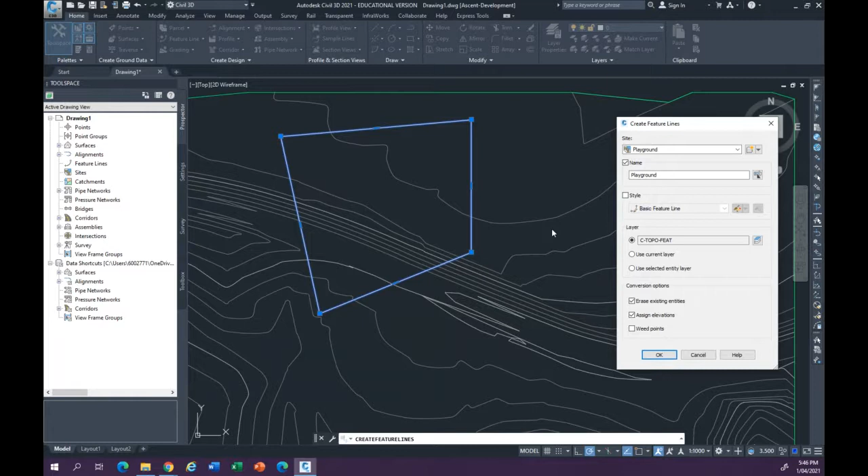That means there will be no cut and fill on that. And if you assign the elevations, they'll ask you to draw. So go to this one, yes. So now you've already done this, which is the feature line.

See here, feature line, because I already selected the feature line, I already selected the polyline. If you never select the polyline, they'll ask you to select the polyline as a feature line. So when you select the polyline, it comes like this. This is a feature line, right?

So after you have the feature lines, you may probably need to create some gradings. I just create a grading by surface, and I think I already created a surface inside.

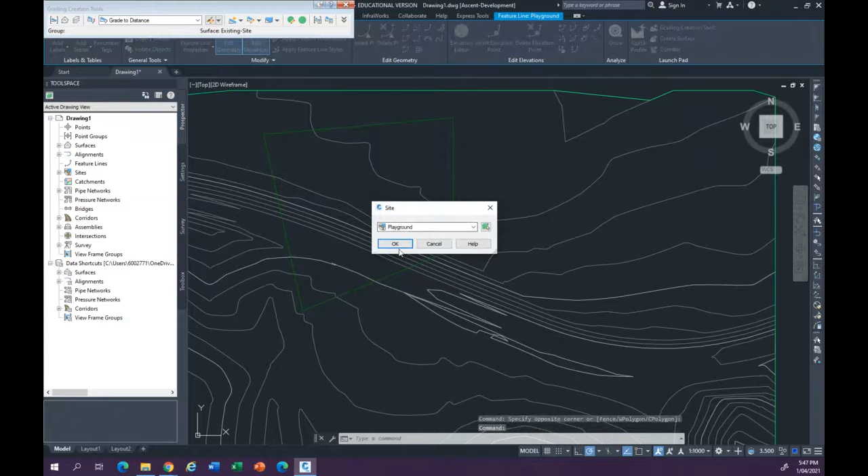Yep, just grading playground, and automatically choose the surface. Click the volume surface, yep, it's okay. And select the feature line, which is that line, and then go without weeding the feature. Just too many points here. Green side.

Grade to distance, grade 50. It's too much, but actually they're making a grading for you, like this. Just trying to show you roughly what that is.

And then after you create a grading, you can just go to the object viewer to see the grading itself. It looks like that. So basically, create a grading here.

So you probably need to fill the grading. So basically, you want a grading, and then going up, and this small piece is gonna be a playground. So that means after you create a grading, you may probably need to fill the grading, and then let this area be filled, and then fill up the grading.

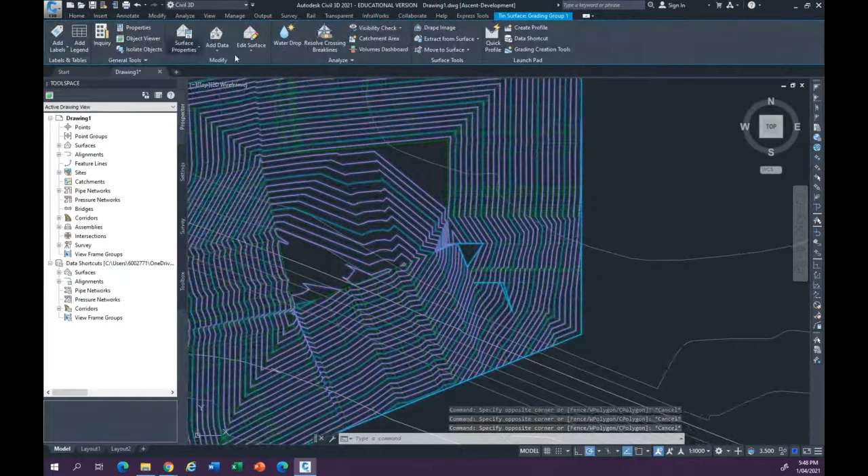So after you fill up the grading, what it looks like, trying to find out the TIN surface, which is here, and then go to object viewer, and you can see this is the field of grading. A little bit weird, but that's all right. So that's the field of grading.

So you will need this to be a playground. It's not flattened yet, but can try to flatten them because I haven't put any elevations. It will just generate elevations automatically, and that's how you create the gradings of the field you want.

And then you can try to build a building on the field here. So that would be basically the grading. Like this, they're making really good grading, like filling fields, but I didn't.

So first of all, for the grading, you need to create a feature line. The feature line can be grading, the feature line can be corridor, can be everything, but it's a feature line. So this feature line we use at the moment for grading.

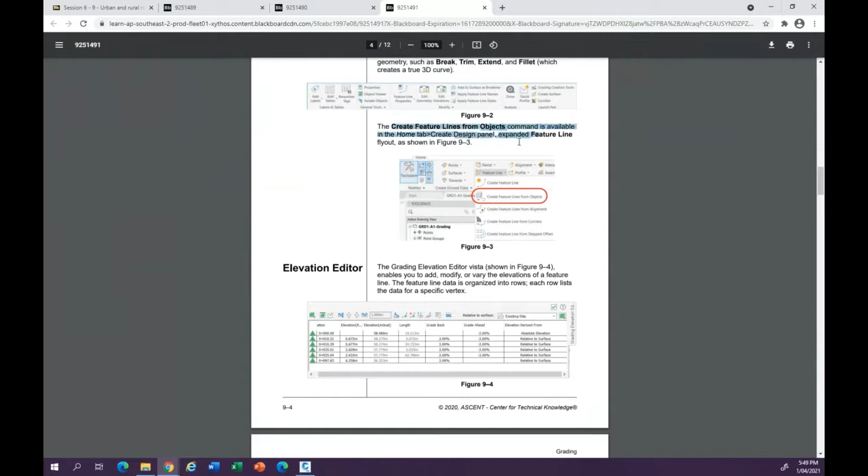For the grading, you can try to create some gradings using the grading tools, and try to modify some grading tools, and after that what you have eventually will be the grading shown here, and this can be anything you want. So that's the grading. Grading is not that hard, and it's not that complicated for you to know.

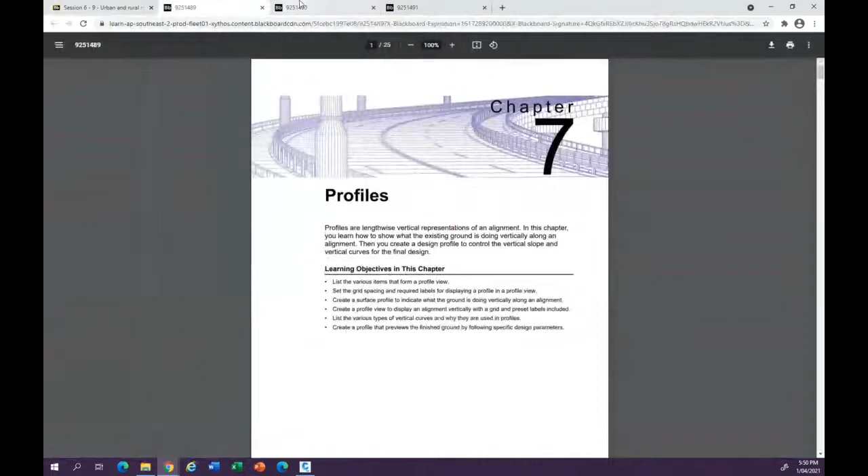Go to the blackboard, you can see this one. Go to the blackboard session 6 and 9. You have this 7, 8, 9, which is those. It's really detailed, you can see lots of things, and then answer the questions as well.

So basically, this is not the step 8. So after you put this one, you go to step 8 here. Yeah, and then they ask you to tell you what.

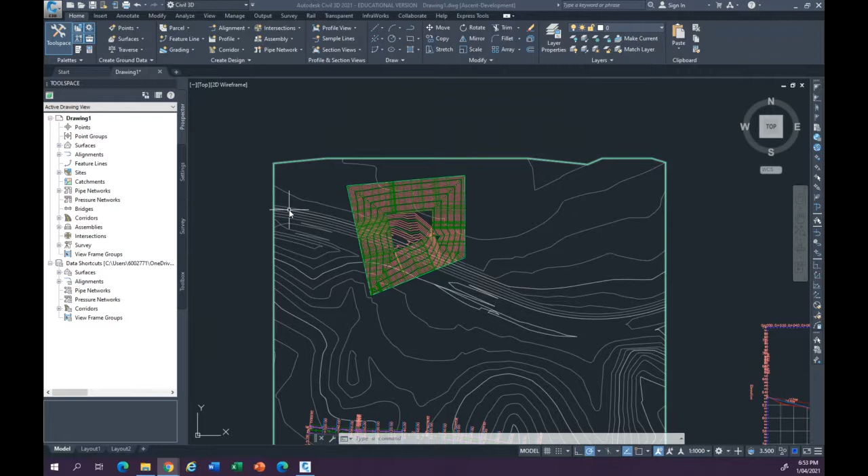So that was how you... forget how to present, yeah I did. Did you change that? Did you change that?

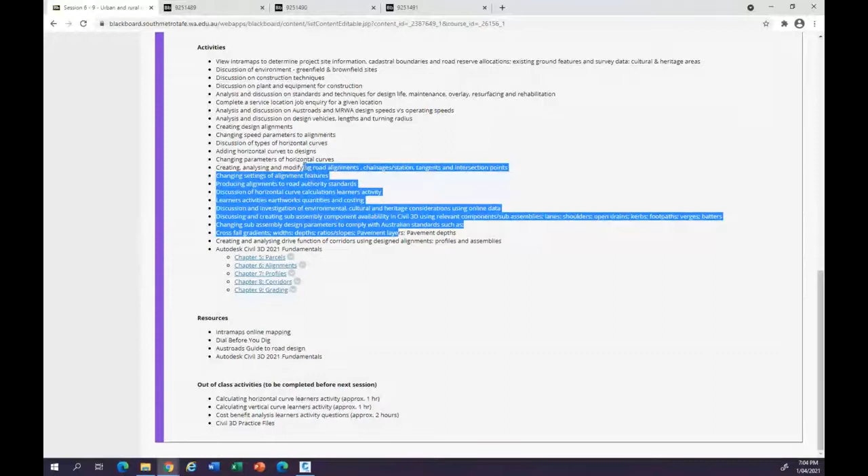I already went through that, I already went through everything. So they should basically know this. But if they do the practice, that's why I asked them to do the practice. If they do the practice, they know more about what I taught. If I just taught them, they probably forget. If they do the practice themselves, they would know.

Select the circle, zoom it in, see the circle at the right top corner, select that circle. No, select the circle, zoom in more. Now select the second circle, this, and then it comes to offset. So let's select the first circle. Control Z to go back, go back again. Hit escape first, escape, Control Z, go back, and do the curve again. Just let it curve again. Yep, that's right, and then set up the parameters.